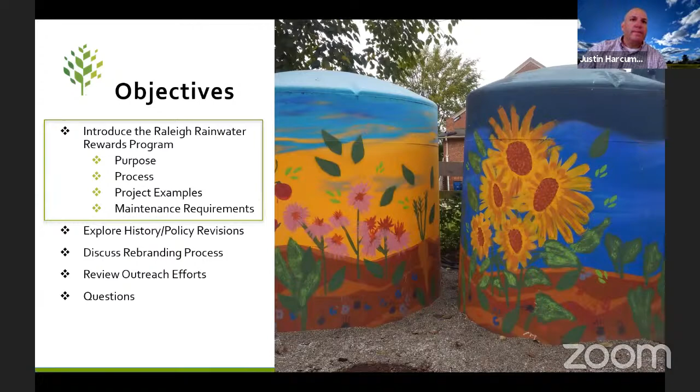So let's go ahead and dive into what is Raleigh Rainwater Rewards. I guess for starters, I always tell folks we're a water quality program and a reimbursement program. At the end of the day, we're primarily a funding mechanism. But along that process, we also provide outreach and extension efforts through the whole life of that project and the development of that project.

It all started back in 2009 when the policy was approved. It was called the City of Raleigh Stormwater Quality Cost Share Program. Why do we have this program? It's to incentivize urban stormwater quality retrofit projects. Some of the benefits here, the city obviously gets the water quality benefit through pollutant removal that these features achieve. And there's a lot of additional and ancillary benefits as well.

There's a lot of education and public engagement. These features are usually aesthetically pleasing, so they're enhancements in that regard. And a lot of them are usable, something like a cistern. Lastly, and really probably what generates a lot of calls, is they may mitigate a larger nuisance drainage concern. Once again, our goal here is to incentivize stormwater quality projects, not mandating.

So we're not mandating projects. These are not for new development where stormwater management is required. It's a voluntary project. Folks come to the program and do above and beyond what is required on their property, or where nothing's required on their property.

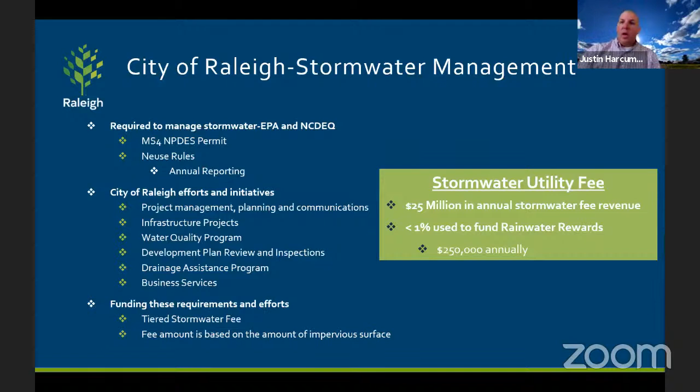So it's a very small portion of what we call our CIP budget, our capital improvement project budget. It's really our lowest funded initiative, but we do get a lot of benefit out of that. I just wanted to show other communities that this type of program is possible and can be a very small proportion of the annual budget.

This is a quick breakdown of where this program lives. We have 20 plus departments in the city of Raleigh. Department of Engineering Services is where Stormwater Management Division lives, and if you go down through programs, there's a water quality section. This section deals with everything from illicit discharge to pollution prevention, good housekeeping, stream monitoring, volunteer outreach efforts, and obviously rainwater rewards.

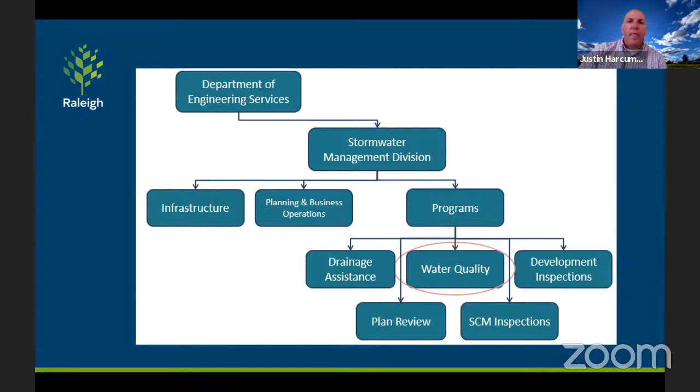Second main point, which I touched on earlier, is that the project has to be voluntary. It has to be above and beyond current stormwater regulations. No project through this program can be used to meet stormwater requirements, including impervious surface limitations or pollutant reduction requirements for new development. So it's got to be above and beyond.

Third, funds have to be available. The city has to have funds available to assist with these projects. And lastly, the project has to be, quote, reasonable and practical, and that's language from the policy. That language gives the approval authority latitude to not approve some projects that may be too innovative, too costly, or don't fall in line with industry standards for water quality projects.

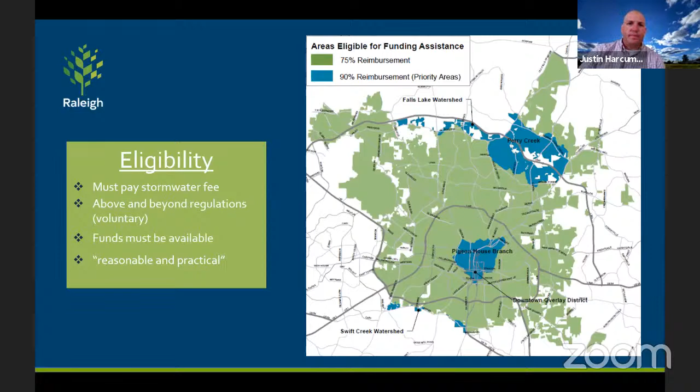Moving on from eligibility, here's our project distribution map. This is showing maybe 10 projects ago, so it's not a current map. If you're interested in the current distribution, please visit our website, Raleigh Rainwater Rewards. But you'll see this pretty much spread out throughout the whole city. There's not a whole lot up in Brier Creek — that's the one area we have yet to complete a project in.

We have approved, I want to say 130 some projects, and I know it's on an upcoming slide, and we already have 3 pending review and approval over the next month and a half. The policy was established in 2009 and has been revised 3 different times, and we'll go into detail about what occurred during those revisions.

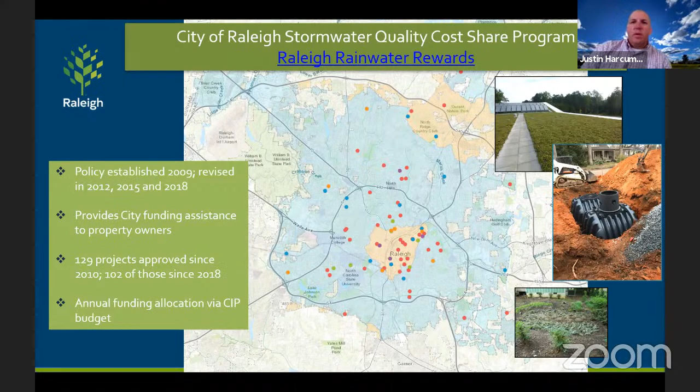Another takeaway is that on average, staff and funding can handle between 25 and 30 projects a year without any additional requests for funding. So that's the trajectory — we're really growing as a program, and word is getting out throughout the community.

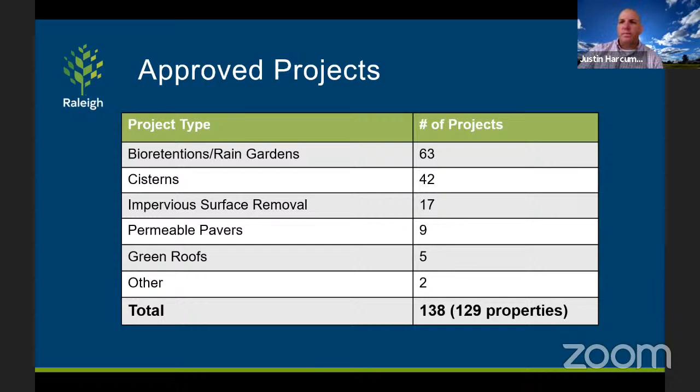Here's that first project type, most popular over the last several years: rain garden, bioretention. We use those terms interchangeably, typically calling it a rain garden for smaller applications, and bioretention for larger multi-unit residential or commercial properties. Same principles involved. We still lean heavily on NCDEQ's minimum design criteria for these features, so even a rain garden will have a profile, and in some cases, even an under drain.

This right here is a rain garden at a church in Southeast Raleigh.

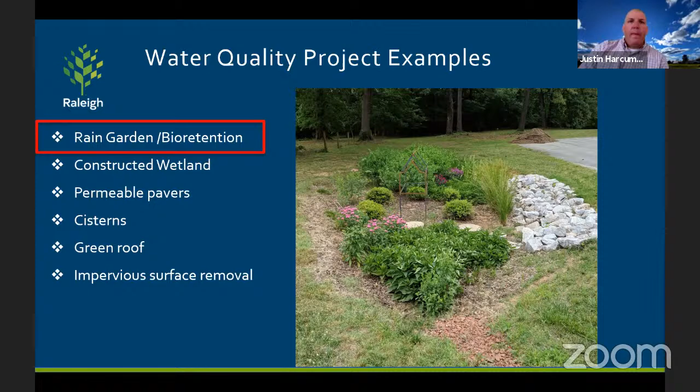Here's two more examples that really show the full range and flexibility of the program. We can support a small backyard rain garden with an under drain, which you can see the access port towards the top of the photo. But you also see this huge bioretention being installed at a church in North Raleigh, which treats right around 2 acres of runoff. So the program has the ability to support anything in this spectrum and everything in between.

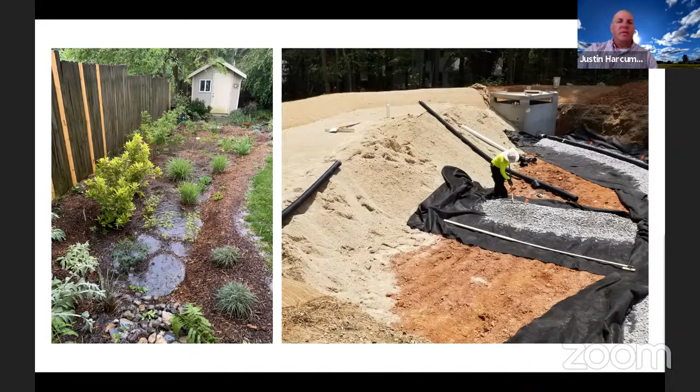Another project type we have not supported yet would be a constructed wetland. The reason being is that these require pretty large drainage areas to install these big footprints, so they're probably limited to bigger property types. We have not had one come in - there's been interest over the years on a couple properties, but no one's moved forward yet with constructed wetlands. So stay tuned, hopefully next time I present this we'll have something to show here.

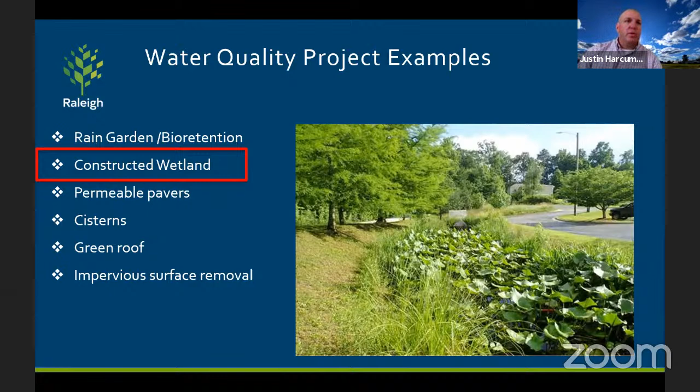Permeable paver projects - we've supported 9 over the last 11 years, a handful of those on residential properties. It's a really tough fit on residential properties due to the high cost and the small amount of pollutant removal. You're dealing with a small footprint for a high cost, you're not treating a whole lot, and there's a lot of design and site considerations which make this project a difficult one for the program to support.

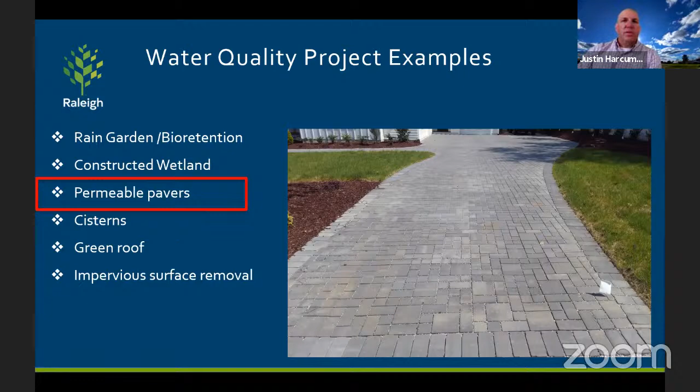Cisterns, being our second most popular project type, will fit on almost any property and have really been one of the real drivers of the program. We support everything from a simple DIY project all the way up to your commercial installs.

You can see here that we do support a small above ground cistern located on a residential property, but we also support underground cisterns as well. All of our cisterns require a passive drawdown, which allows the cistern to draw down between rain events and always have capacity for the next rain event. That's really what makes it a water quality device - we don't want to assist with installing a vessel or cistern and having it remain full for the duration of the year. So that passive drawdown is a key component of any project we support.

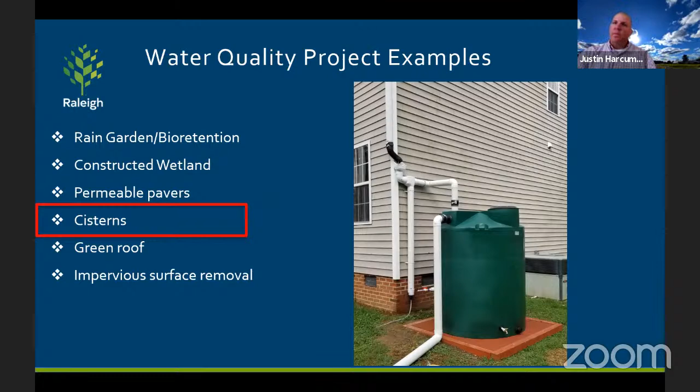Moving on to a couple more examples. Here is a cistern used by Leaf and Limb Tree Service Company off Now Road. It's a 2,000 gallon cistern, and they use it to fill up their tree service trucks, which are 400 to 500 gallon trucks. They can fill up their fleet of 4 vehicles with a full cistern and don't have to use city water for that.

Interesting application here and a really popular project. As I mentioned, we do support a few underground cisterns. These can be cost prohibitive, and we have to ensure that we're capturing enough runoff to make these justifiable to support. So we have supported a few of these in the past as well.

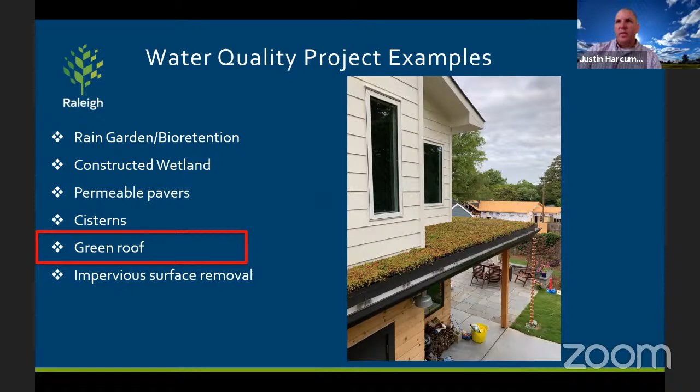Green roofs. We have only supported 4 green roofs, and these are difficult projects to support. This is an example on a residential property. They do not offer the same pollutant removal as some of the other project types we described, and because of the high cost, they sometimes do not compare well to other project types. So we've supported 4 throughout the history of the program, and they still remain on the menu moving forward.

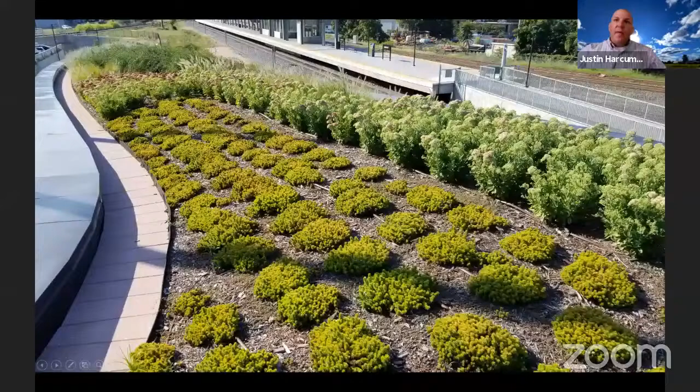This is our largest example, and I believe it's still the largest green roof in Raleigh. It's this whole concourse on the north side of this picture, starting with the flagpoles all the way down to the left of the photo. Raleigh Rainwater Rewards supported this green roof back in 2017, along with several other projects on the property. This one is really remarkable, and it changes through the seasons. We just recently had a sign installed on the property so that folks realize they're looking at a green roof when they're up on this viewing deck.

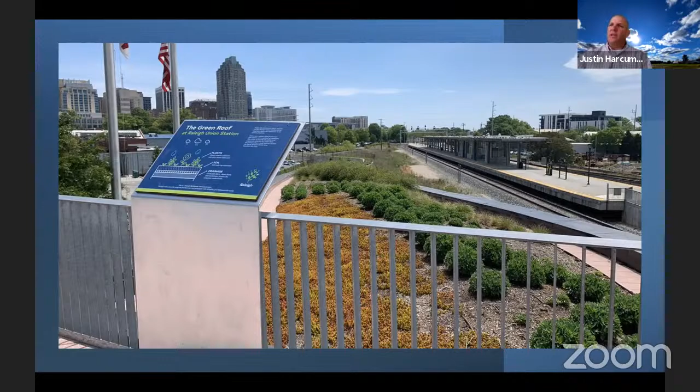So turned out well. The other city-owned green roof that this program has supported is actually out at Buffalo Road Aquatic Center, on the roof there. This is a photo during the install. It's been there almost 10 years since install, and it's still functioning.

Also wanted to touch on this. Like I was saying earlier, it's a relatively new project type. We call it impervious surface removal. It's as simple as it sounds: you remove impervious surface, demo the old concrete, till up those underlying soils, and then establish vegetation. The program will support everything from a small patio removal all the way up to parking lot removal.

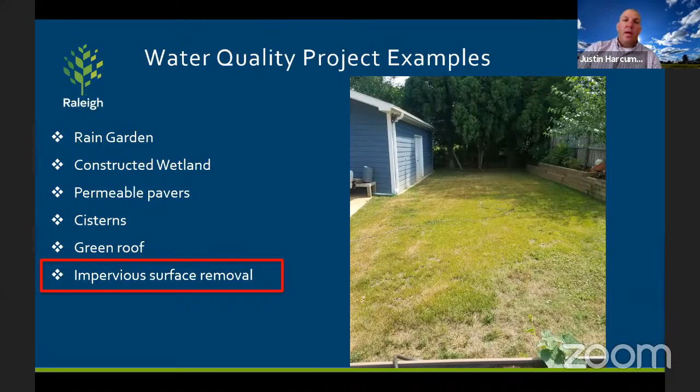All right, well, that's a rundown of the project types we support. The next slide really gets into the 8 steps of the program, from initial interest all the way through to project completion. It's a very high level handout that we give a lot of folks, but like every government program, there's a process, and this is the path the project takes from start to finish.

It usually starts with the petitioner contacting city staff. Sometimes we'll reach out proactively, but 9 times out of 10, an applicant will hear about the program through some of our outreach efforts or from a neighbor or friend and reach out.

The city staff will then schedule a site visit with the applicant or interested party, and they'll go visit their property and discuss site limitations, project limitations, and design limitations on what they want to do or what would work on their property.

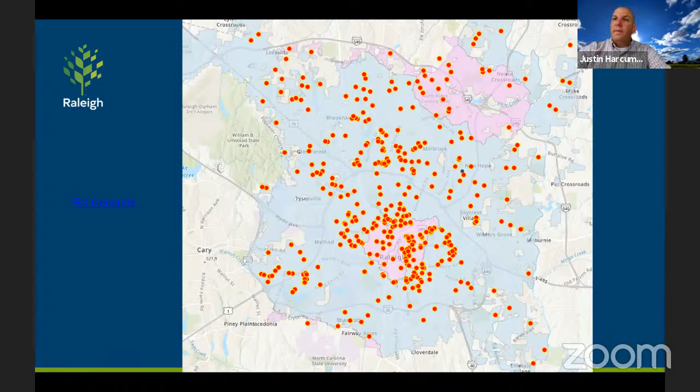Like I said, this whole thing starts with contacting city staff. And so here is a quick map grab I did of consults since 2018. We've had 550 plus site visits and consult requests just since 2018, and they span every area of the whole city. It's a pretty impressive map, showing the kind of reach that we're getting.

And really, back to this, I wanted to reiterate what is in that legal agreement. When I say it defines deliverables, it's going to have that project description for the applicant - what they're installing - and their maintenance term. There is a maintenance term that is required, either 5 or 10 years, which I'll get into in a few slides. And then it also defines the amount of money that the city is willing to reimburse for the project. So all of that's spelled out in the legal agreement, and we're able to refer back to this agreement for the full life of not only the project installation, but of the full maintenance period.

So kind of the big takeaway from this whole process, the back and forth with staff and the applicant is, the regular involvement with city staff is ongoing from step 1 all the way through the maintenance period, which is 5 to 10 years.

Secondly, the property owner and the contractor or designers are really who design the project. We might help them make decisions, give them guidance, but it's really their project. We're just going to make sure that it meets our requirements and our goals. Back to that legal agreement, that really serves to protect the owner, giving them the peace of mind to move forward, knowing that the city will reimburse up to a certain amount, and it protects the city by defining what is actually being installed and maintained throughout the life of the project.

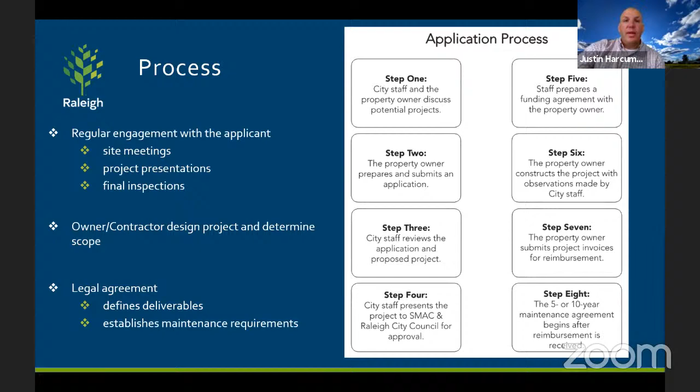That's probably enough on process there. So I mentioned maintenance requirements. Now that a project's done, what does that maintenance look like? Like I said, or as my manager had said, everybody wants to help plant the garden, but nobody wants to weed it. And so that's definitely been a challenge with Rainwater Rewards projects, but also for all GSI projects probably since they started installing them. So we have probably a better track record than most because of that legal agreement we talked about.

Generally speaking, it's a pretty straightforward requirement. Anything where we reimbursed $5,000 or less, it's only a 5-year maintenance period, and there is an annual report that needs to be submitted. It can be completed by the property owner or homeowner, and it just includes some photos - pretty general, pretty easy box to check. Staff will make a site visit if requested, if needed, or if there's not a response. If the city reimburses over $5,000, then it's a 10-year maintenance period with the same requirements.

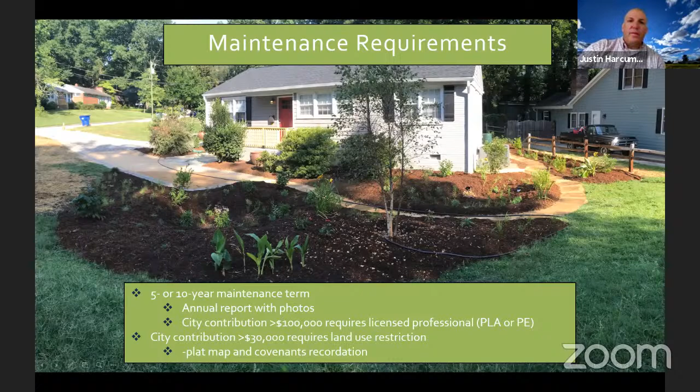And then for your larger, more costly projects, if it's greater than $30,000, it requires a land use restriction, recorded on the plat map with covenants and restrictions, recorded prior to reimbursement. And then if it's over $100,000, it actually involves a licensed professional seal, both on the design plans, but also at time of each annual inspection. So there is a tiered approach for maintenance that increases with more responsibilities for the applicant as the amount of reimbursement increases.

So going back to that second tier, most projects are going to be under the $30,000 reimbursement threshold, so most are just going to be doing the annual report with the photos. However, those projects over $30,000 will have - this is an example of a plat map exhibit - showing the areas that certain activities can occur in to protect the stormwater device, and then we have language to support that. This will be recorded with a note saying that this requirement will sunset at the end of 10 years. So it is a temporary requirement, but it does involve a little bit more legwork, and it protects the city's investment even through the change of ownership or points of contact at the facility.

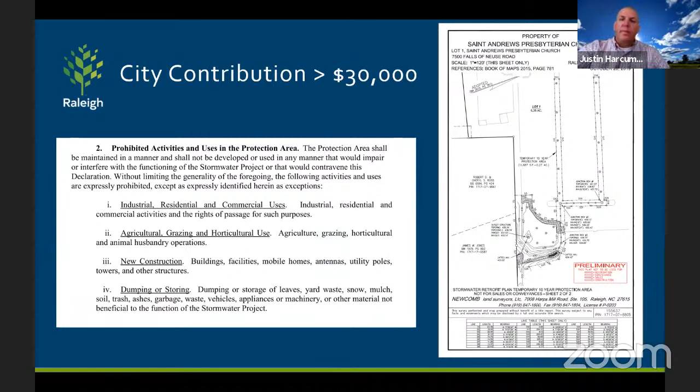So moving on to the history of the program - pretty much how we went from good, better, to best, really. We are the program we are today because of some of the revisions that occurred over the last 10 years, and I'll go into greater detail on those.

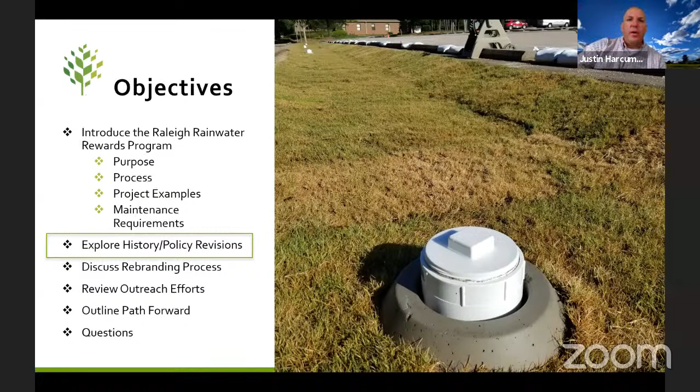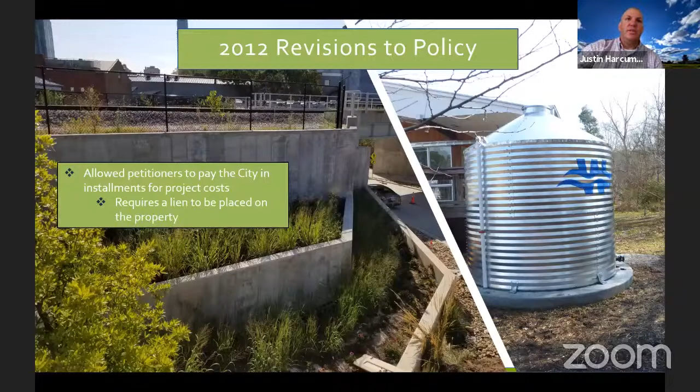So back in 2012 was our first revision to the policy. It was very small. The Rainwater Rewards program was initially started along with the sister program called the Drainage Assistance Program. Those projects are generally more expensive—larger structural repairs, bigger in nature, sometimes supporting whole neighborhoods. So they made a change to both policies, the Drainage Assistance Program and Raleigh Rainwater Rewards, to allow petitioners to pay the city in installments for project costs. It does require a lien to be placed on the property. As far as I'm aware, this has never been utilized by anyone for a water quality project, but it's still in the policy. That was one of the first changes, not very consequential.

Moving to 2015, though, there were some substantial changes. By this point in the history of the program, it had enough projects and context, and it hit enough obstacles, to be honest, to present meaningful changes to the policy. The big changes that came out of this revision period were that 5 water quality target areas with a 90% cost share were created. It also eliminated some residual incentives where there was a 50% rate for a shorter maintenance term. Instead, they just said 90% reimbursement in those 5 target areas, and then 75% for the rest of the city—simplifying things and increasing that reimbursement incentive.

There was also some significant text changes. It used to say 'lowest cost alternative,' and the approval authority really wrestled with the meaning of this. So that was changed to 'acceptable cost.' That term is still used today, and it's more appropriate because it's what's acceptable by the approval authority, and they have and will utilize that to determine which projects should or should not be supported.

Lastly, these changes called out 2 project types for changes. Probably the most impactful was the change for permeable paver projects. City Council did not want to be in the business of replacing every driveway in the city of Raleigh at 75 or 90% cost, but they did want to support green stormwater infrastructure. So they went about an approach to support just the elements of the project that make a driveway permeable. For permeable paver projects only, they no longer reimburse the cost to remove the existing driveway, and they don't cover the cost of what it would cost to install a traditional driveway in that footprint. The cost reimbursement is just for what is above and beyond. So we settled on a formula where we take a general cost of a traditional driveway and then subtract that from the cost of a permeable paver driveway.

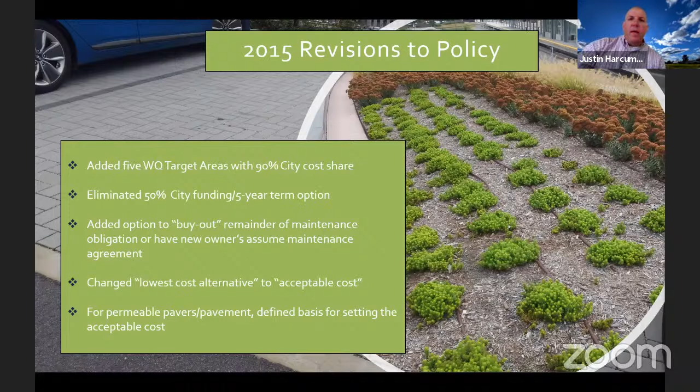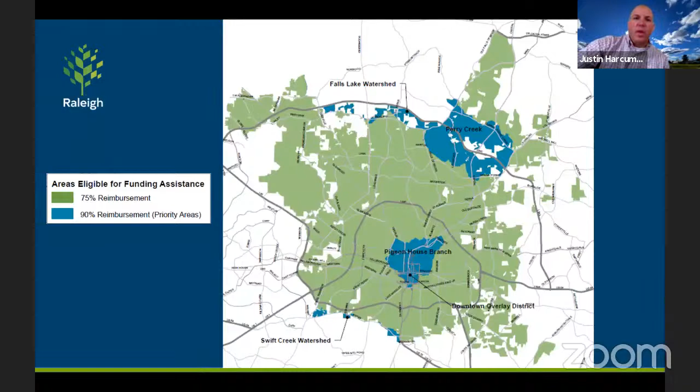Probably the most impactful thing that came away were the 5 target areas eligible for 90% reimbursement. You have your Perry Creek and Pigeon House Branch—these are impaired watersheds identified by the North Carolina Department of Environmental Quality. You also see Swift Creek and Falls Lake watersheds, of which there's a small amount in the city of Raleigh; these are both water supply watersheds, so they're a high priority. We also utilized a downtown overlay district that overlaps Pigeon House Branch, where everything's pretty much built out—it's all impervious surface. So those previously 4 areas, along with this downtown overlay district, move forward with the 90% reimbursement areas. The rest of the city, shown in green here, is eligible for 75%. That takes us through the 2015 changes, which were significant.

And then 2018—by this point, the program has really been expanding. It's generating a lot more interest, and really, efficiency of process is where the improvement was needed. These changes were a game changer for the program.

It broadened what could be applied for. One instance is that it allows completed projects to be considered as long as they haven't been completed beyond a year—they have to be completed within a year of application. That was important because construction timelines do not always correspond with the stormwater management division's and approval authority's timelines. They're still evaluated using the same criteria, but it did open that up as a possibility for applicants.

It also added a lot of the maintenance requirements that I mentioned earlier, with the greater than $100,000 city cost contribution, with the licensed professional sign-off and seal.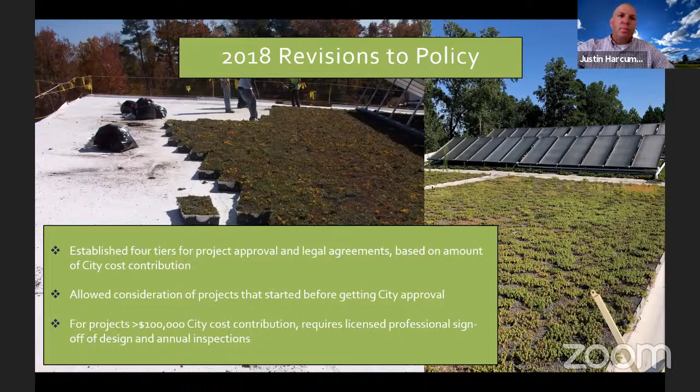And I would say most importantly from these changes, they approved this approval matrix, which was adopted, and it pretty much delegated authority to staff for a lot of our lower cost projects. You'll see that city staff is the approval authority for anything up to $5,000. And that really took a lot of burden off city council and our Stormwater Management Advisory Commission, where previously everything would have to go all the way up to city council.

When we were starting to look at projects, 25 a year, that's a lot of work, especially for these low cost projects. So this matrix was approved, and it really delegated authority down so that city staff had approval of some tiered projects. The Stormwater Management Advisory Commission, or SMAC, would have approval for a big portion of projects, and then only your largest projects would actually be reviewed by city council.

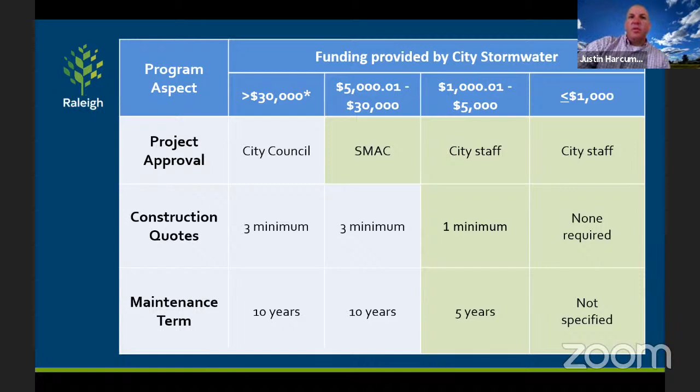They implemented three minimum construction estimates to be used as a basis for reimbursement, and then extended out the maintenance terms, like I've already mentioned, the 10 years for anything over $5,000.

So that's the history of revisions, and it really has not only improved the program but made it a lot more efficient. We were probably not in a place where the policy allowed us to process 25 to 30 projects a year when we started out. And now that is definitely the case thanks to these changes.

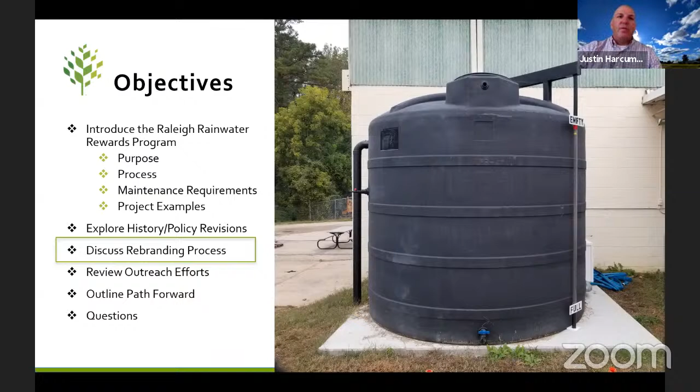So I'll move into our rebranding process and what's occurring around this period, 2018, after we've made these policy revisions. We're floating right around 17, 18. So things are starting to pick up.

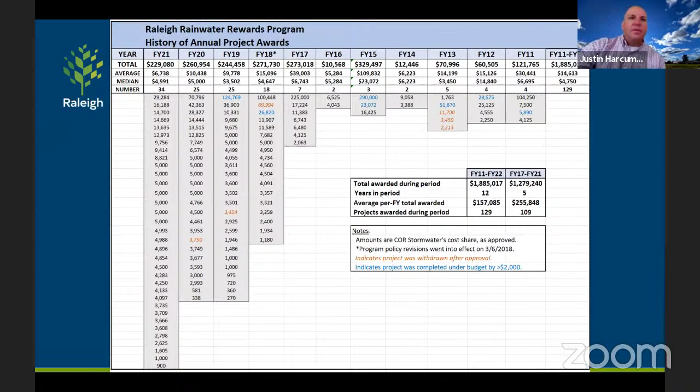We had real limited participation, as mentioned before, prior to this time. If you just look, we're sitting right here, fiscal year 17 and fiscal year 18, and something obviously changes over those years. We had staff come in who were really energized about the program, and they wanted to develop some goals.

They wanted to increase the number of participants. They wanted to maximize limited marketing resources. And they wanted to increase or diversify the type of property these projects are being used on—instead of just single family home sites, we wanted to expand the program to get some commercial or institutional properties involved.

Along the same time, along comes the UNC School of Government Environmental Finance Center. They received a grant to study stormwater management incentive programs. We were both geographically and in a position as a program to be very willing and easy partners for their studies. So we teamed up with the UNC School of Government, and after studying and surveying multiple programs throughout the nation, they were able to generate a pretty good report with a lot of great ideas that we were able to take and implement into our own program.

Probably the biggest change was, as I've mentioned before, we started this program out as City of Raleigh Stormwater Quality Cost Share Program, and that mouthful became the alliteration Raleigh Rainwater Rewards. It came at just a perfect time for the program. These improvements were implemented, and almost suddenly we had communication.

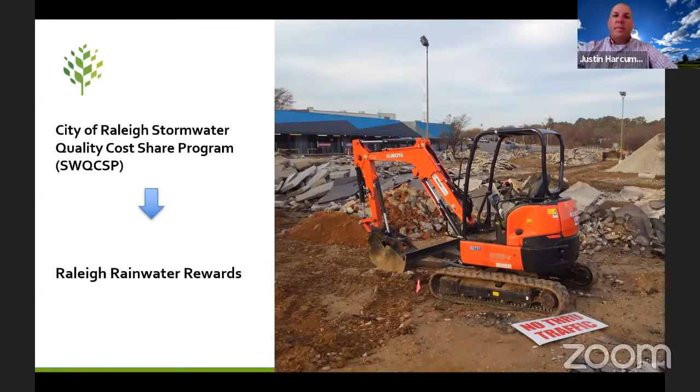Stakeholders helping out, which is a great segue into this section here, the outreach efforts. Because at that point we're rebranding, and we were designated our own communication department liaison, and they have been supporting the outreach efforts. And almost overnight, the program grew leaps and bounds.

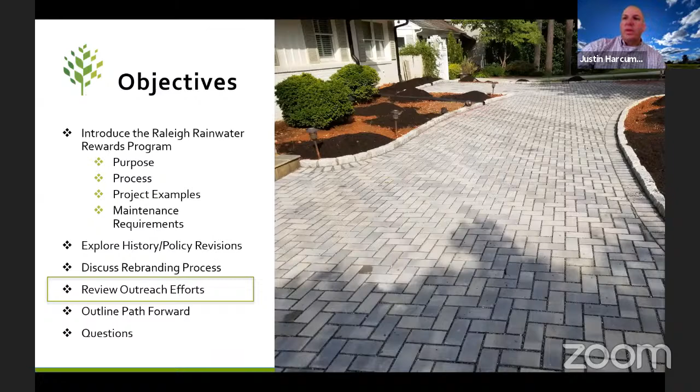Here's just a few of the initiatives we moved forward with after that report. Most of these have roots in that UNC School of Government 2018 report. Our largest outreach effort to date was a public utilities billing insert. We actually had an insert reach, with the new name shown there on the right, the Raleigh Rainwater Rewards name. And then it described the program briefly and different project types.

142,000 of these at least went out, and it changed the program overnight. Our phones and emails rang off the hook from pretty much March to December 2018. So that was a huge turn in the program's history.

In addition to this, which reached out to mostly homeowners, we also sent out targeted postcard mailings to institutional and commercial properties. We reached out to churches and schools and to property management companies who manage a lot of apartment complexes and multi-unit residential properties, and had some pretty good success.

We also conducted a GSI tour for some Wake County school stakeholders, and we've implemented a customer service survey so that folks can provide feedback on their experience working with city staff and through the program's process. We were able to take that advice and make informed changes to the program.

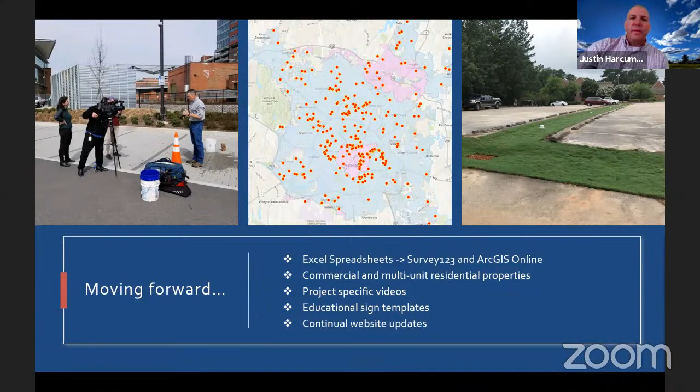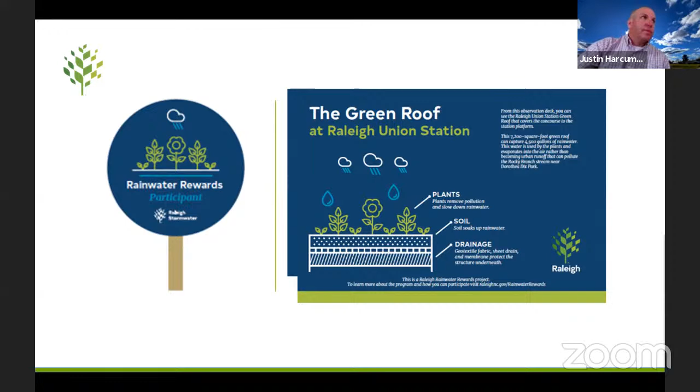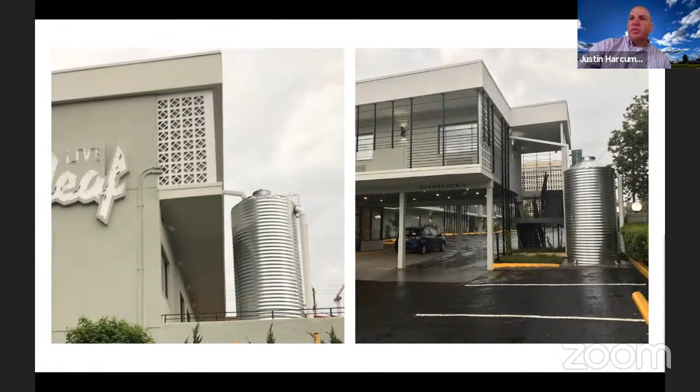Another high visibility project is this cistern project in the old Days Inn downtown, now the Longleaf Inn. There's a total of 6 cisterns throughout this property. You have the 2 very high profile metal ones you see here on the front, and then they have 4 additional workhorses, I like to call them, along the back of the hotel, which I have a picture of, and it captures right around 8,000 gallons of water. A lot of these are hidden in plain sight, a good example in an urban setting when there's not a good footprint but a lot of stormwater being generated.